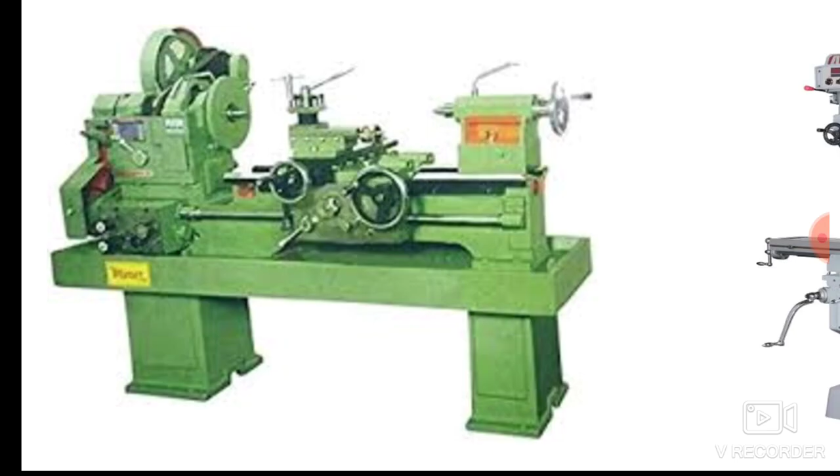So this is an image of the lathe machine. Here you can see the lathe machine. The lathe machine has different components like the headstock, tailstock, tool carriage, bed of the lathe machine, pan, leg of the lathe machine, then the slides. These are the different components of the lathe machine.

In the spindle the chuck is attached, and to that chuck you can clamp your workpiece. Then you can clamp the single point cutting tool in a tool post, and the feed can be given with the help of the tool carriage. Here you can see different handles.

With these handles you can move the cutting tool along the x axis, along the diameter of the job, or along the length of the job, that is the z axis. Then at the end there is a tailstock. The lathe machine also has a pan where you can collect the chips. These are the different components of your lathe machine.

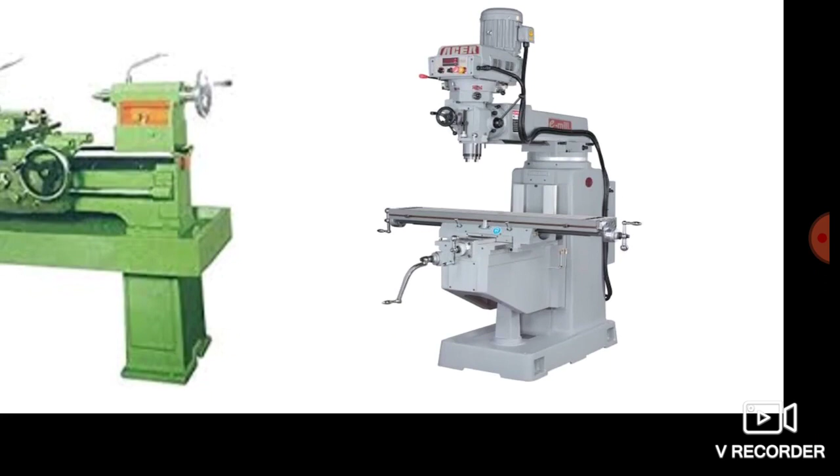So the point is, the machine tool used for turning operation is called the lathe machine. Milling, on the other hand, is carried out in a milling machine. Here you can see the image of the milling machine, the vertical milling machine. Basically, there are two types of milling machine.

The first one is vertical milling machine, VMC, and the second one is horizontal milling machine. So this is the image of the vertical milling machine.

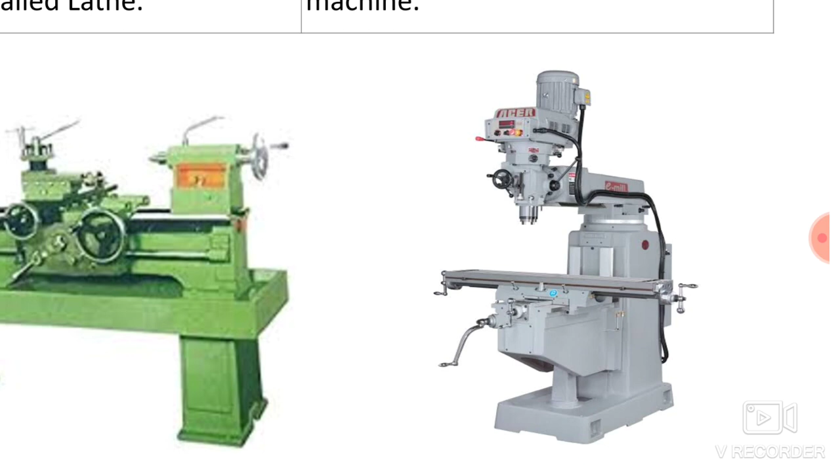Here you can see the table of the milling machine where you can attach the workpiece with the help of a vice, and the table gives motion to the workpiece along the x and y axis, whereas the z axis motion can be given with the help of the table again. You can move the table up and down, or along left and right direction, in and out, left, right, in and out, up and down.

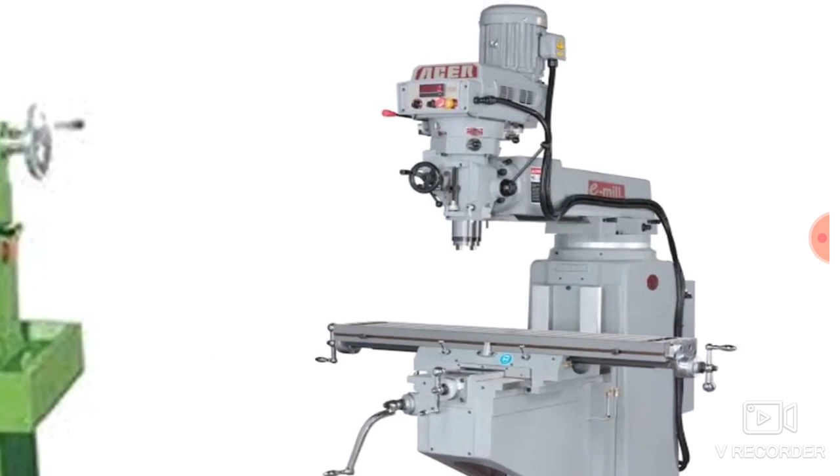That is nothing but the three different axes of milling machine. In the spindle you can attach the end mill cutter or different types of cutter, and with that you can process or machine the component.

The lathe machine has only two axes, x and z. X is along the diameter, z is along the length, whereas milling machine has three axes, x, y, z. X and y axis are parallel to the table, and the z axis is perpendicular to the table.

Now the third point: turning process utilizes a single point cutting tool called SPTT, single point turning tool. In lathe machine you can use a single point cutting tool. This is an image of a single point cutting tool.

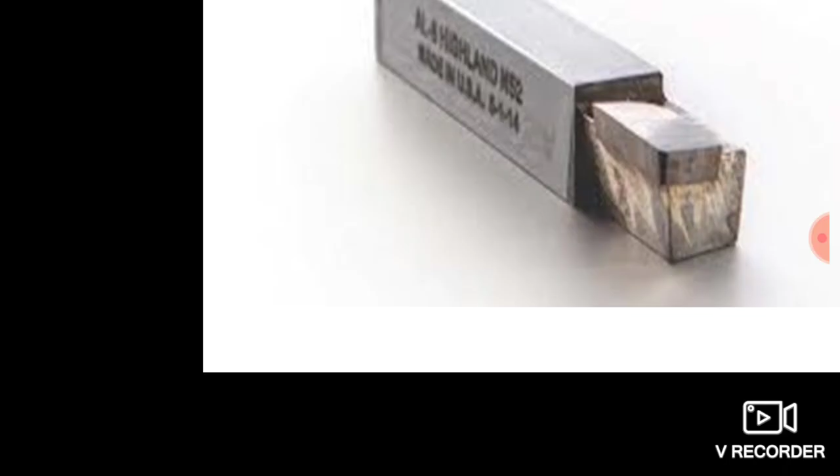Here you can see a cutting insert that is brazed to the tool. You can attach the insert with the help of various techniques - you can clamp it with the help of a screw, or directly braze it over the shank. This single point cutting tool has to be fixed with the help of a tool post, and then the feed is given, and this single point cutting tool removes material from the workpiece.

In turret lathe you can attach the cutting tool in a turret. The turret will have different stations, like 12 station, 16 station, and in those stations you can attach this single point cutting tool. Then in milling process, it utilizes a multi-point cutting tool called milling cutter.